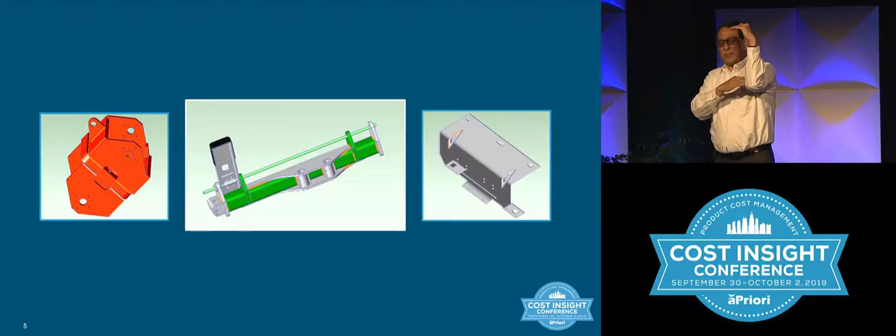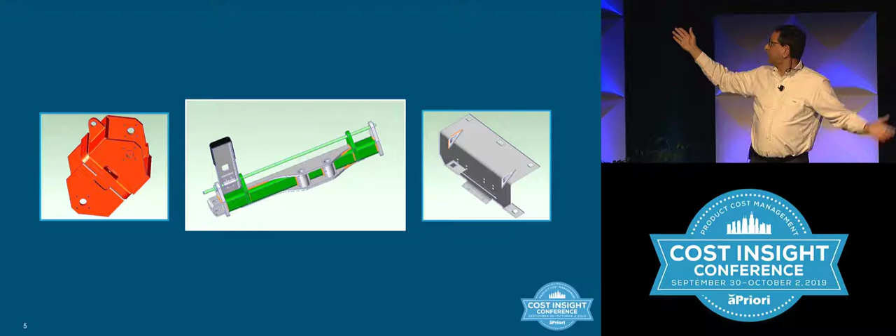So I'm going to be showing you how the thing works with a lot of sample data. And all you're going to be looking at is part numbers and part numbers. So I wanted to give you a little picture of what you're looking at. I'll have one roll-up, one collection of assemblies. These are the 3 assemblies. One is a thin sheet metal part assembly. One is a medium 4 millimeter thick type part. And the other one is plate, basically, so it's a heavy one.

Then I'll be showing you a collection of, I think, 12 machined parts, ranging from some turned parts all the way out to 5-axis machining parts. And I also have a Graco plastic seat in there with a lot of plastic parts.

All right. Start out by talking about capacity risks. As my story said, a lot of times it's not intended by the supplier. I didn't get up that morning and say, how am I going to screw my customer today, right? They actually want to deliver to you on time because they want business from you later. But both of them wish they had some prior knowledge of how much risk there really was in that deal, okay? And this is what I'm going to try to show you. So what you can do with aPriori is ahead of time, before you even, should I reset that?

Before you even send the RFQ out, okay, you can run a report. This is Cost Insight. How many people have seen Cost Insight before? All right, only a few.

So Cost Insight is a reporting tool that sits on top of aPriori. It allows you to look at all that wonderful data you generate when you're generating cost. When you're generating the cost, aPriori is also generating cycle time data and setup time data and material data. So it's gathering all that information. What machine did it use? What size was it? All of that. It's basically generating all of that for you, and this allows you to look at that.

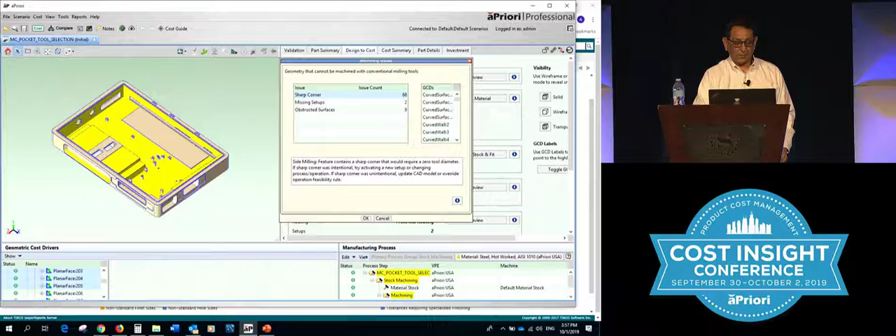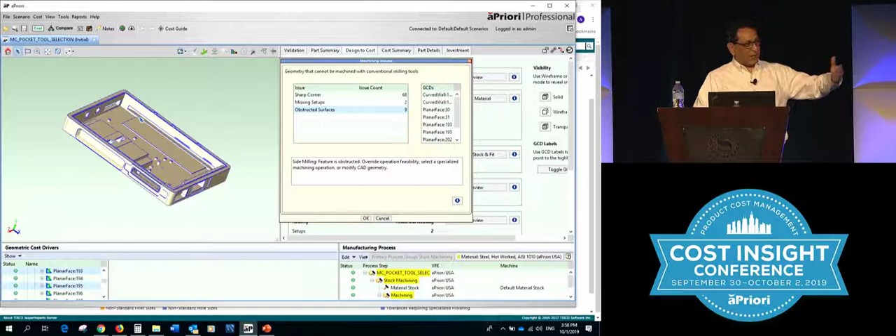This is a machine part, right? So you could start out with a casting and then machine it, basically. I could start out with a box and then machine it from there. But it is a machine part. You can see you have obstructed surfaces. Those are kind of hard to find. You have one right there, for example. So it shows you basically what's going to be difficult to make, both from the customer side and the supplier side. Does that make sense? Okay.

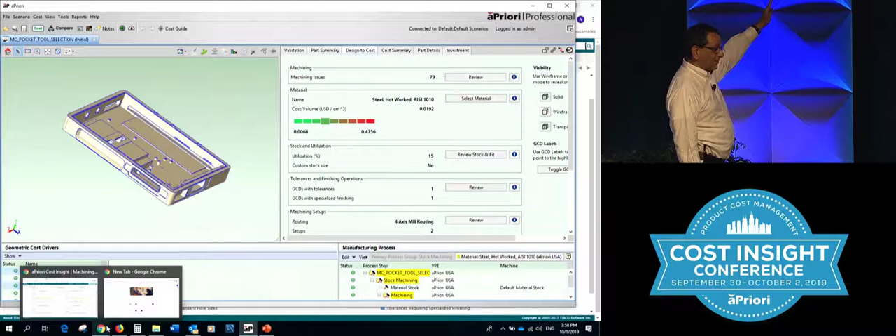Excuse me? We need to fix it in the CAD model to get the proper cost. Yeah. So if you leave it like this, then it's going to try to use a dental tool by the time it gets to that corner to try to make it as fine as possible. But if you put the proper round, it'll use the proper size tool so that it becomes cheaper. So the answer is yes. All right?

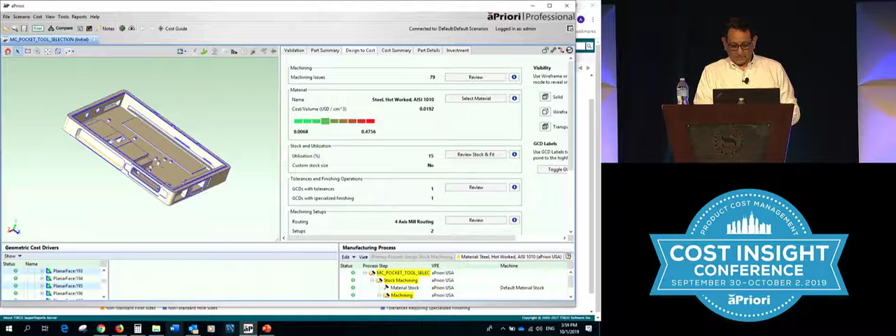You assign tolerances to that machine part? Yep. It'll adjust cost based on the tolerances. Correct. So it will basically do a lot of things automatically. If you put the tolerances in the CAD, we can pull it from the CAD. Most people don't. So we have a way for you to put them in, okay?

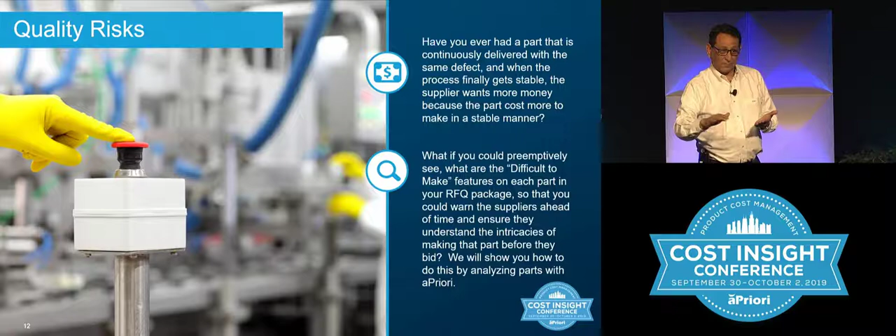And then he'll say, okay, if you have a really fine finish, it'll go to polishing. If you have a finish that's nice, but it's not really all that fine, then it'll slow down the machining process. So it'll add the proper cost based on the tolerances. And obviously if you need to drill and then bore, it'll add the boring to it.

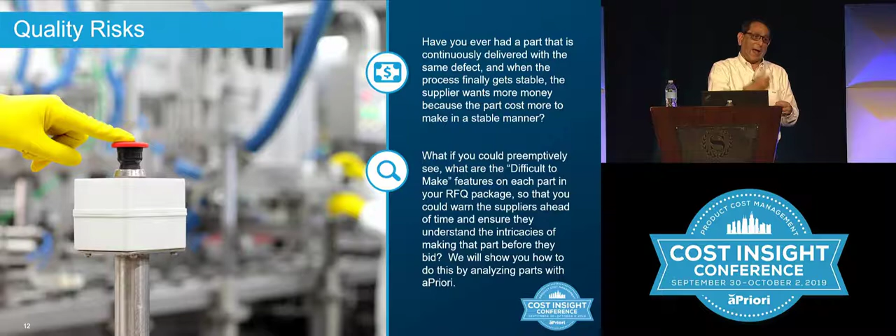I'm out of time. Oh, I'm so sorry. You give me 2 minutes?

All right. So tariffs. One day we have a tariff with this country, the next day with the other country. But what if you could tell what the impact of those tariffs is on the things you're buying, or how much exposure do you have in the products that you make due to these tariffs? So very quickly here, I want to show you that you can actually use aPriori to try to assess that.

Because aPriori is calculating or estimating the cost of the part and the cost of material, let's say that you bought these parts from a supplier. Supplier comes to you and says, about 80% of the cost of the parts that I give you is in material, and I got hit with the 30% tariffs. So I am going to give you an uplift of 25%, just a blanket, so I don't go one by one.